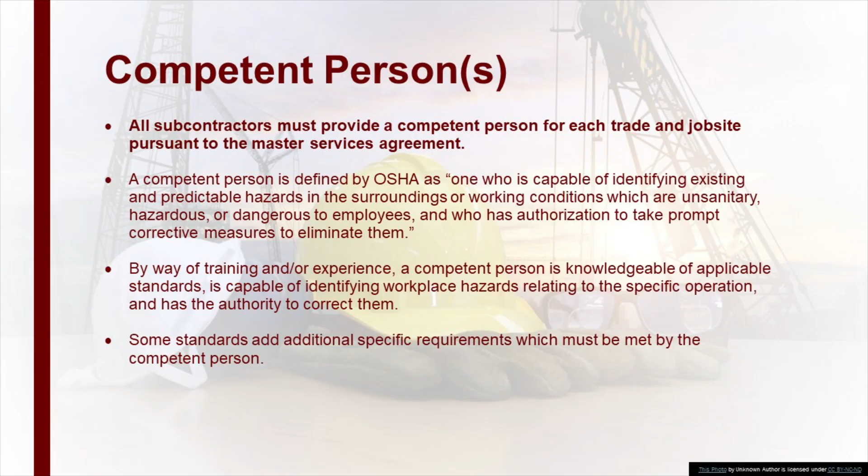All subcontractors must provide a competent person for each trade and job site pursuant to the Master Services Agreement. A competent person is defined by OSHA as one who is capable of identifying existing and predictable hazards in the surrounding or working conditions which are unsanitary, hazardous, or dangerous to employees, and who has authorization to take prompt corrective measures to eliminate them. By way of training and/or experience, a competent person is knowledgeable of applicable standards, is capable of identifying workplace hazards relating to the specific operation, and has the authority to correct them. Some standards add additional specific requirements which must be met by the competent person.

If you are not feeling well, please don't come to work. Practice social distancing, maintain 6 feet of distance apart. Cleanliness and hygiene: wash your hands with soap and water, or use hand sanitizer frequently. Avoid touching the nose, mouth, eyes, and face. Clean and disinfect frequently used tools and equipment.

Communicate: report all suspected cases of COVID-19 illness. Be aware of COVID-19 signs and symptoms.

Skill Signal apps are free and available for download to any device. Clock in and clock out with your personal phone. Daily health screening questionnaires will appear on your personal device upon clocking in. Automated daily logs and analytics of attendance. Video orientations keep workers informed and aware of immediate surroundings. Record-keeping compliance allows workers to upload certs and training cards to their profile.

Holt superintendents will communicate the following with subcontractors before arrival to the job site. Ask your company-designated competent person about the site-specific information listed below: access points, emergency egress, muster points, bathroom facilities, hand wash stations.

Prohibited: stealing, gambling, jewelry, music or MP3 players, illegal drugs or alcohol, smoking except in designated areas, firearms, knives longer than 4 inches. Zero tolerance for fighting, horseplay, riding in the back of a pickup, cell phone use while working, harassment including sexual, racial, staring, and rude comments. Violations are subject to Holt Construction disciplinary policy, which includes immediate removal from the project.

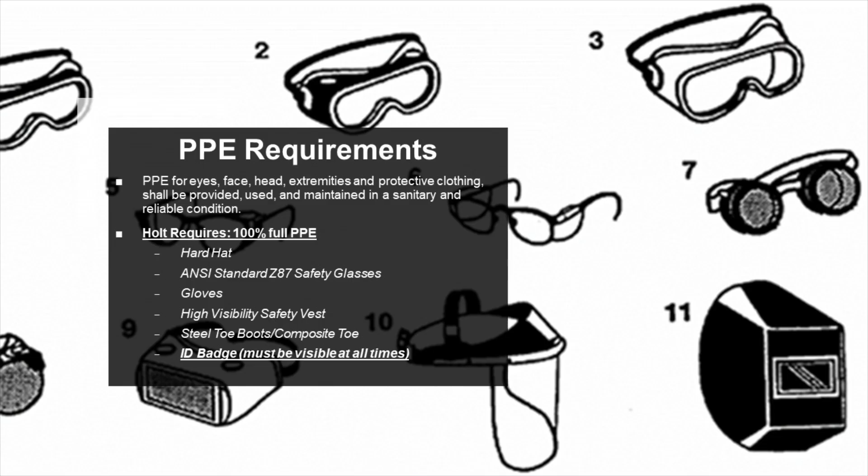PPE for eyes, face, head, extremities, and protective clothing shall be provided, used, and maintained in a sanitary and reliable condition. Holt requires 100% full PPE: hard hat, ANSI standard Z87 safety glasses, gloves, high visibility safety vest, steel toe or composite toe boots. ID badge must be visible at all times.

Hard hats: your brain is the most vital part of your body. Any damage done there will affect the rest of your body in some way. Even small objects can seriously hurt you if you are unprotected and they fall from great heights.

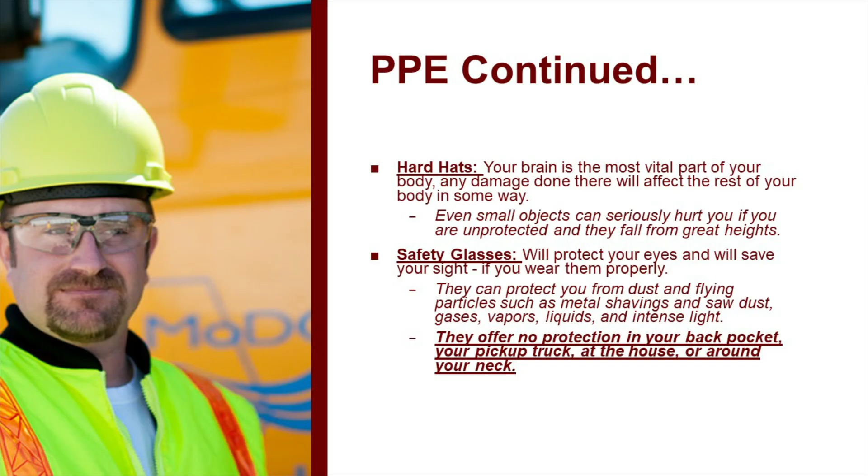Safety glasses will protect your eyes and will save your sight if you wear them properly. They can protect you from dust and flying particles such as metal shavings and sawdust, gases, vapors, liquids, and intense light. They offer no protection in your back pocket, your pickup truck, at the house, or around your neck.

Gloves: your hands are your wage earners. Protect them. Holt requires 100% glove use on site. Hands are hurt more often than any other part of the body. Hand injuries don't have to occur. It is up to you to think and keep them out of trouble. Be sure you wear the right kind of gloves for the particular kind of work you are doing.

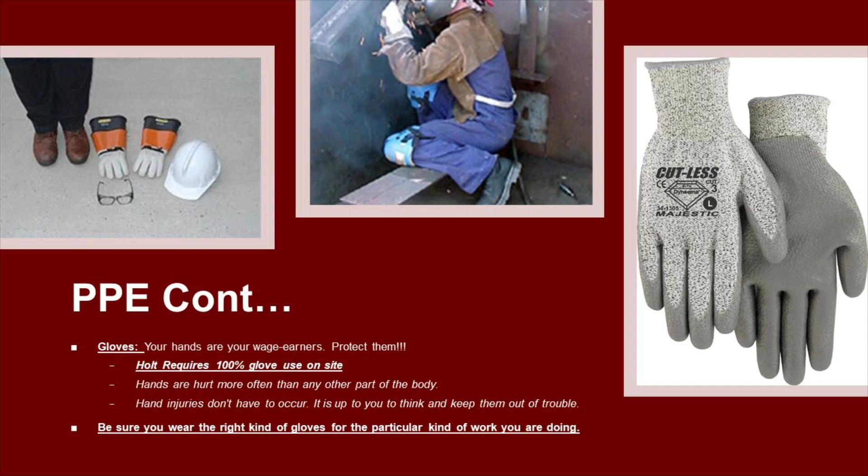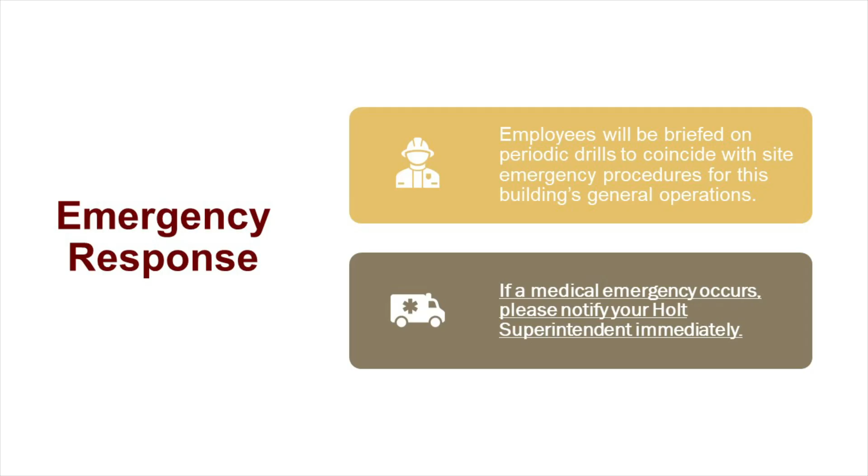Employees will be briefed on periodic drills to coincide with site emergency procedures for this building's general operations. If a medical emergency occurs, please notify your Holt superintendent immediately.

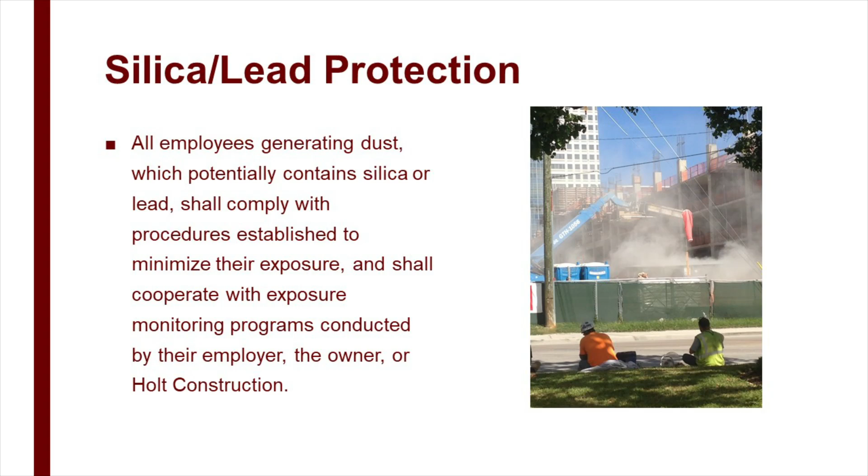All employees generating dust which potentially contains silica or lead shall comply with procedures established to minimize their exposure, and shall cooperate with exposure monitoring programs conducted by their employer, the owner, or Holt Construction.

Holt Construction Corp shall maintain and provide a complete inventory of chemicals brought to the job site via SDS. Note: SDS must be on site.

All SDSs will contain product information: product identifier, name, manufacturer and suppliers names, addresses, and emergency phone numbers, hazardous ingredients, and physical data.

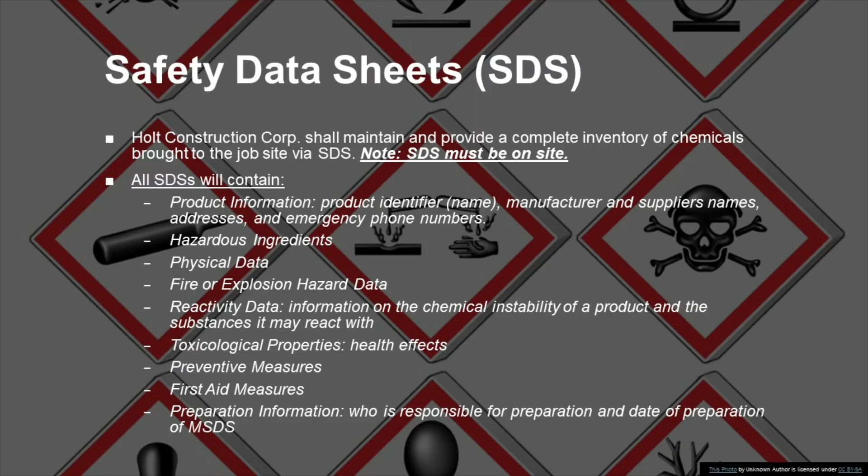Fire or explosion hazard data, reactivity data, information on the chemical instability of a product and the substances it may react with, toxicological properties, health effects, preventive measures, first aid measures, preparation information, who is responsible for preparation, and date of preparation of MSDS. When handling chemicals and hazardous materials, appropriate safety equipment must be properly donned.

This includes hard hats, goggles and or face shields, rubber gloves, aprons, and work shoes. Drop cloths will be used to contain any splash off or accidental spill.

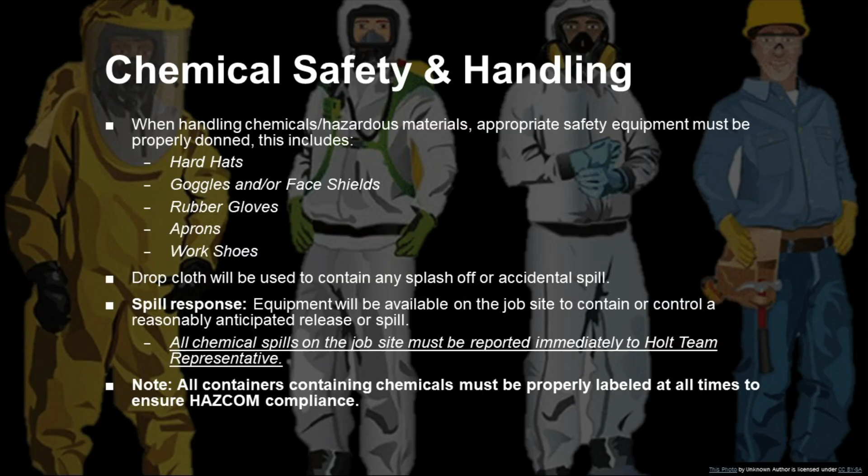Spill response equipment will be available on the job site to contain or control a reasonably anticipated release or spill. All chemical spills on the job site must be reported immediately to a Holt team representative. Note, all containers containing chemicals must be properly labeled at all times to ensure HAZCOM compliance.

Proper lifting procedures should be utilized when lifting objects off the ground. Break load into parts, get help with heavy or bulky items, ask or use a dolly. Lift with legs, keep back straight, do not twist. Use handling aids such as steps, trestles, shoulder pads, handles, and wheels. Avoid lifting above shoulder level.

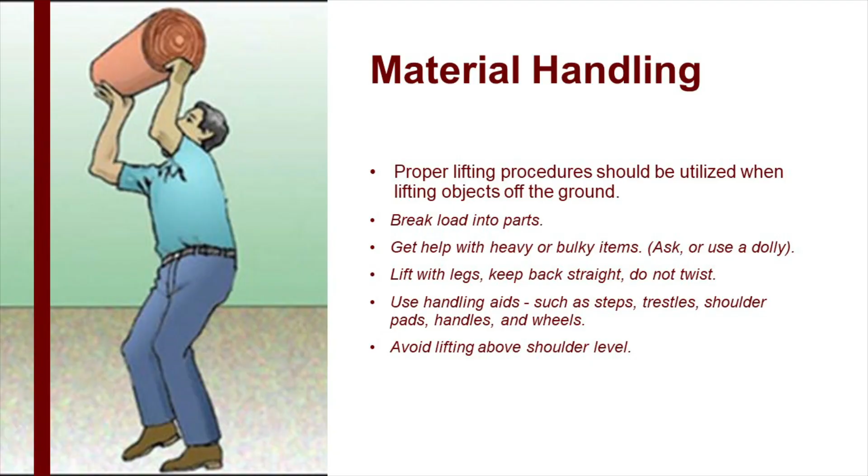Report all accidents and incidents immediately to a Holt team representative, including injuries, property damage, fires, and near misses. Accident reports include date, time, location, description of operations, description of accident, photographs, interviews of employees and witnesses, and measurements.

We have permit processes that need to be completed before you can work. Multiple permits may be required for your workday. Your foreman or supervisor is responsible for completing these permits. You are responsible for reading, participating with the process, and signing off on the JSA, Job Safety Analysis. If you feel like something can be added to this document to make your crew safer, do not hesitate to bring this to the attention of your foreman or supervisor.

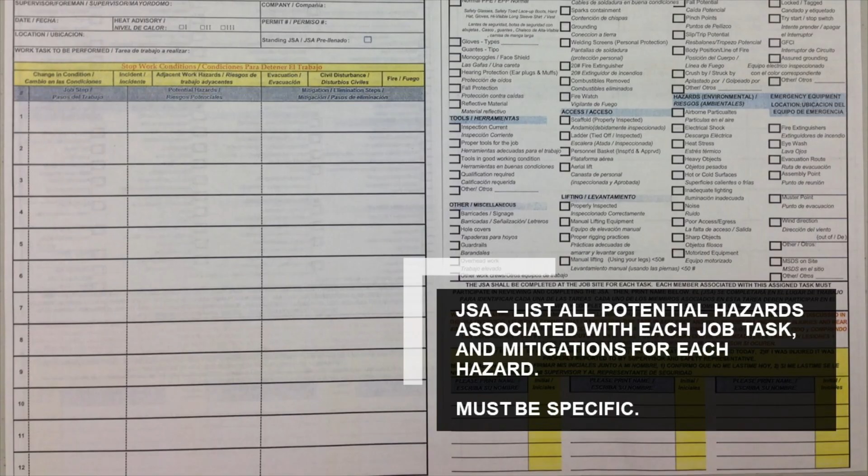JSA: list all potential hazards associated with each job task and mitigations for each hazard. Must be specific. Hot work permit.

Confined space entry permit. Every confined space on site is considered a permit-required confined space. SDS sheets for the confined space will be kept at entry and exit portals of the confined space for the duration of work. Atmospheric testing must be performed before entering a confined space.

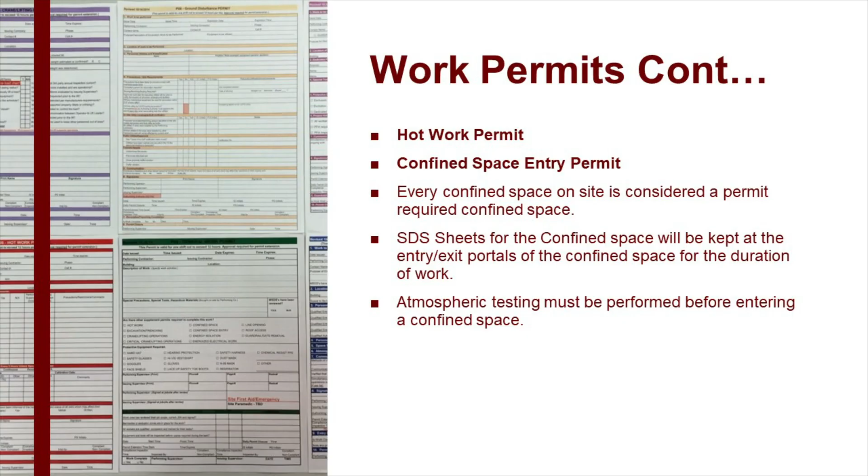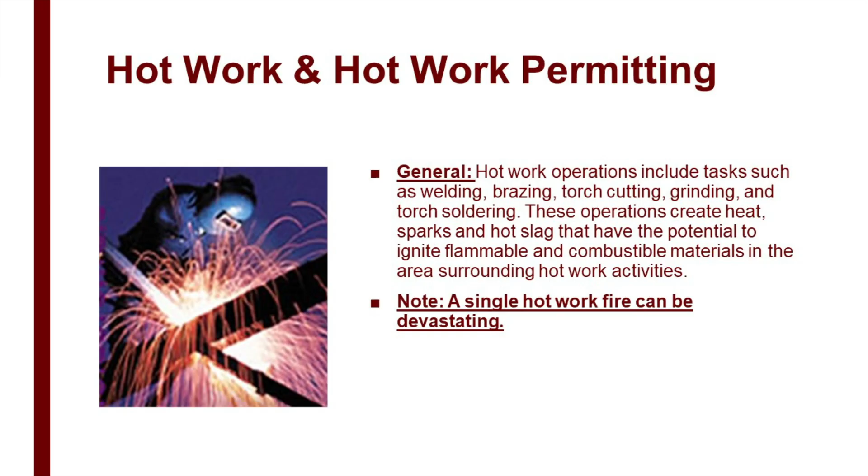General: hot work operations include tasks such as welding, brazing, torch cutting, grinding, and torch soldering. These operations create heat, sparks, and hot slag that have the potential to ignite flammable and combustible materials in the area surrounding hot work activities. Note, a single hot work fire can be devastating.

Guidelines: hot work should be performed in designated hot work locations. A hot work permit is valid for one day and for one area. It should be posted in the area of hot work for the duration of the activity.

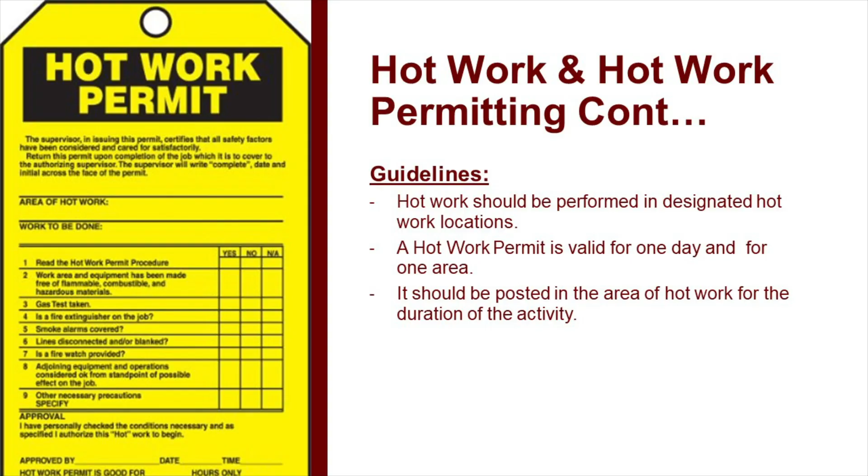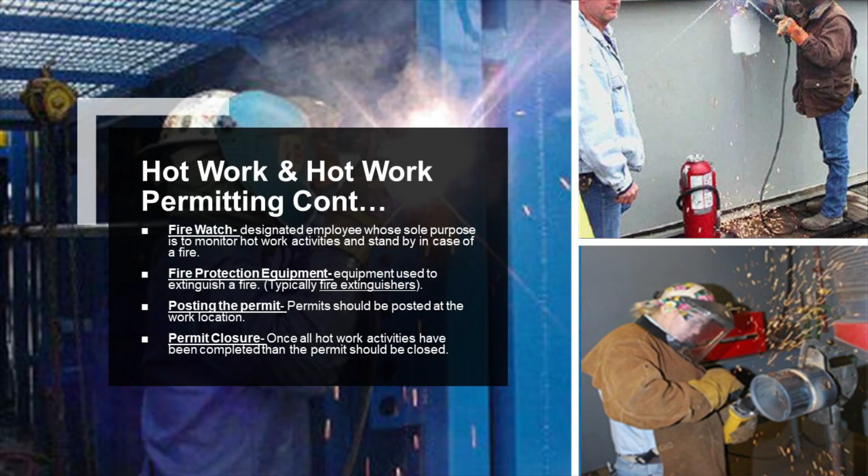Firewatch is a designated employee whose sole purpose is to monitor hot work activities and stand by in case of a fire. Fire protection equipment is used to extinguish a fire, typically fire extinguishers. The permit should be posted at the work location. Once all hot work activities have been completed, the permit should be closed.

Lockout: the placement of a lockout device on an energy isolating device ensures that the energy isolating device and the equipment being controlled cannot be operated until the lockout device is removed. When a lock is attached to an energy isolating means, it is not to be removed without authorization of the authorized person responsible for it.

Tagout: the placement of a tagout device on an energy isolating device indicates the energy isolating device and the equipment being controlled may not be operated until the tagout device is removed. When a tag is attached to an energy isolating means, it is not to be removed without authorization of the authorized person responsible for it.

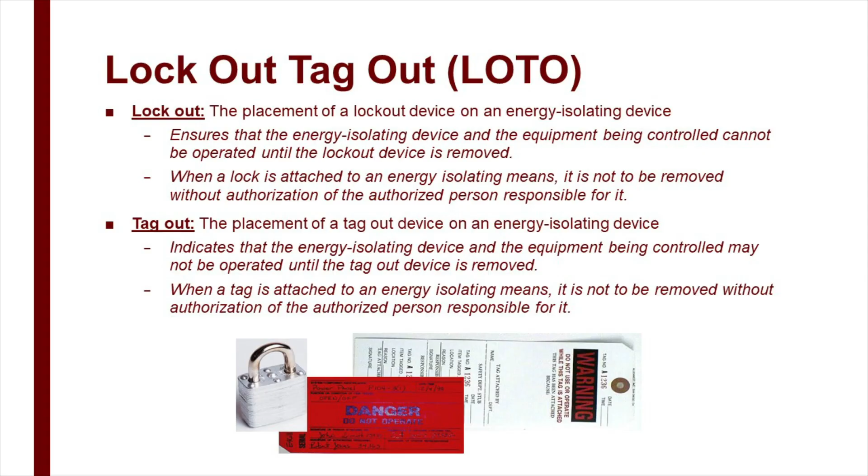When not in use, cylinders shall have their valves securely closed and regulators removed, and the protective cap must be in place. Storage should be outside of the building or structure when these are not being used within 24 hours. Weekends will be considered storage, and these need to be stored in an approved location.

All CGCs will be moved or transported in approved carts and properly secured. Ensure that your company name is on the CGC.

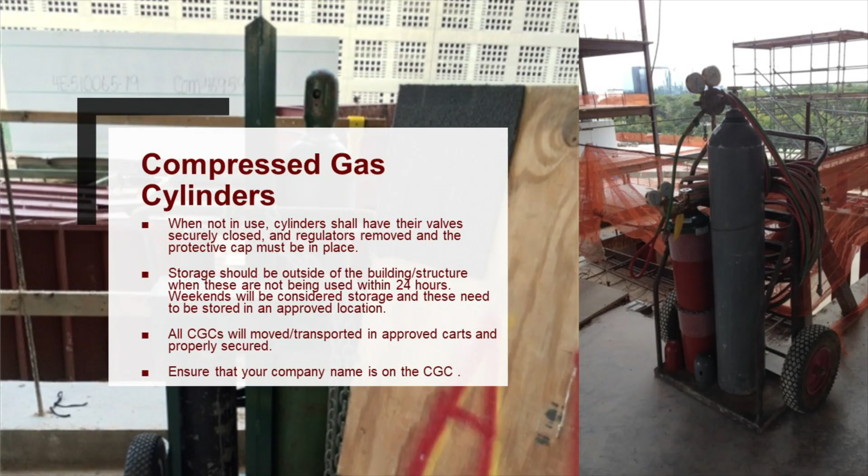Always operate your tool according to manufacturer's instructions. Maintain your tool regularly, keep cutting tools sharp. Never remove guards, disconnect tools when not in use. Never use a damaged or defective tool. Remove damaged tools and tag them do not use.

Keep cords away from sharp edges. Do not use corded power tools in wet areas.

Use tools in well-lit areas. Be sure you have been trained on the tool you are using. Use the right tool for the job. Inspect your tool before use. Must be certified to use.

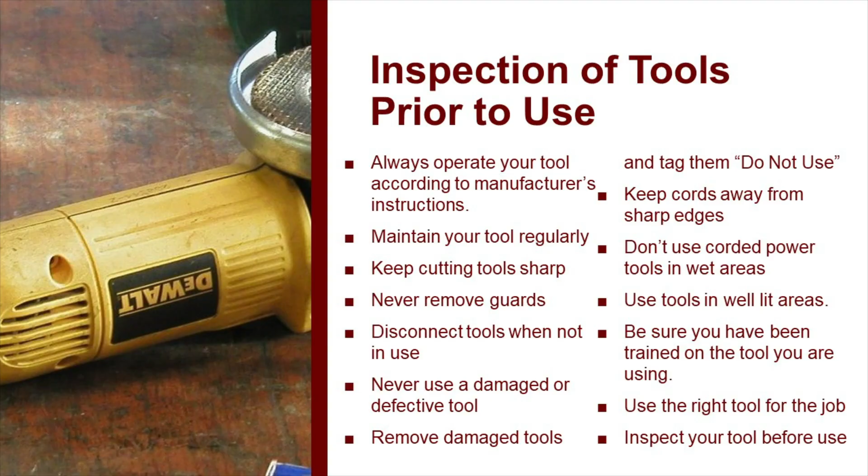Never point the tool at anyone. Never place your hand over the muzzle of a loaded tool. Always wear eye protection when using these tools. Always wear hearing protection when using these tools.

Load immediately before firing only. Do not leave tools or accessories unattended, even for a short period of time. Never carry a loaded tool from one job to another. Keep power-actuated tools in a safe place when not in use, preferably under lock and key.

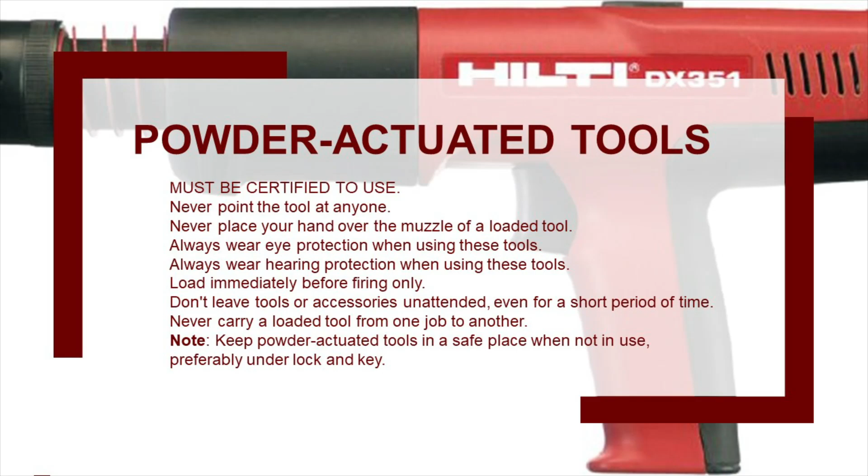All extension cords are to be 12 or 14 gauge, 3-pronged, and damage-free. This includes ground prongs must be in place. Outer insulation must be damage-free. Cords not free of damage will be removed from service immediately.

GFCI protection is required for all electrical equipment. Subcontractor personnel are required to perform daily inspection on all electrical cords and power tools. All tools, cords, and power sets shall have an assured equipment inspection program maintained on a quarterly basis.

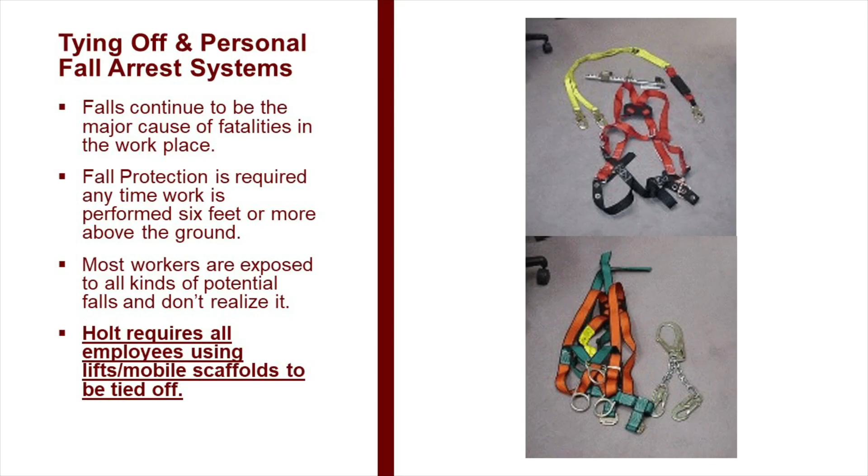Falls continue to be the major cause of fatalities in the workplace. Fall protection is required any time work is performed 6 feet or more above the ground. Most workers are exposed to all kinds of potential falls and don't realize it. Holt requires all employees using lifts or mobile scaffolds to be tied off.

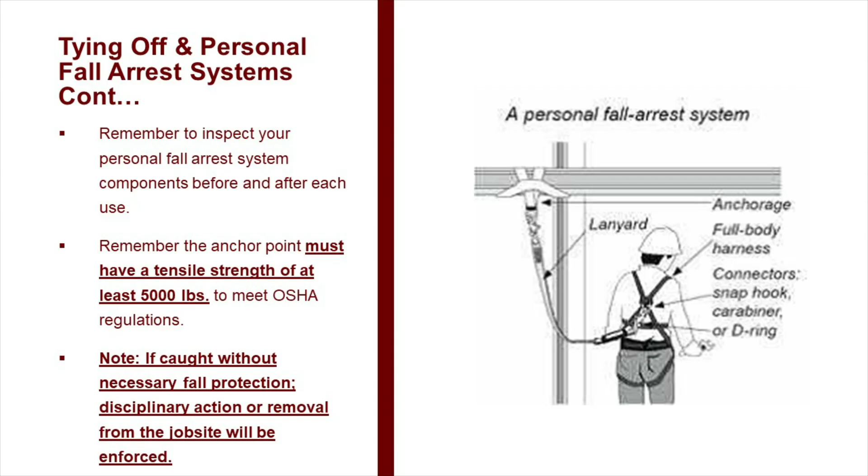Remember to inspect your personal fall arrest system components before and after each use. Remember the anchor point must have a tensile strength of at least 5,000 pounds to meet OSHA regulations. If caught without necessary fall protection, disciplinary action or removal from the job site will be enforced.

Aerial lifts include boom-supported aerial platforms, such as cherry pickers or bucket trucks. Employees need to have a certification card for the operation of a boom or scissor lift. Safe work practices when using lifts.

Inspect all aerial lifts before use. Do not stand on the rails, buckets, planks, or any makeshift device while working from aerial devices. Use a body harness with a lanyard attached to the boom or basket to prevent the workers from being ejected.

The major causes of fatalities are falls, electrocutions, collapses, and tip-overs. Scissor lifts or booms require 100% tie-offs at the job site.

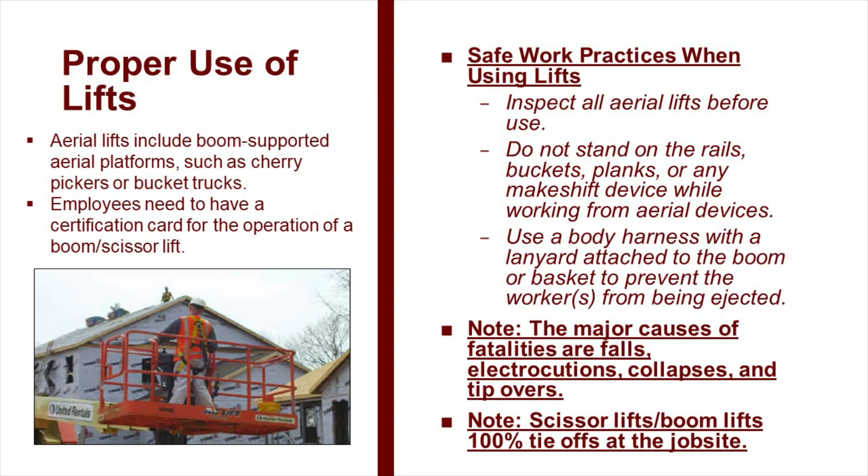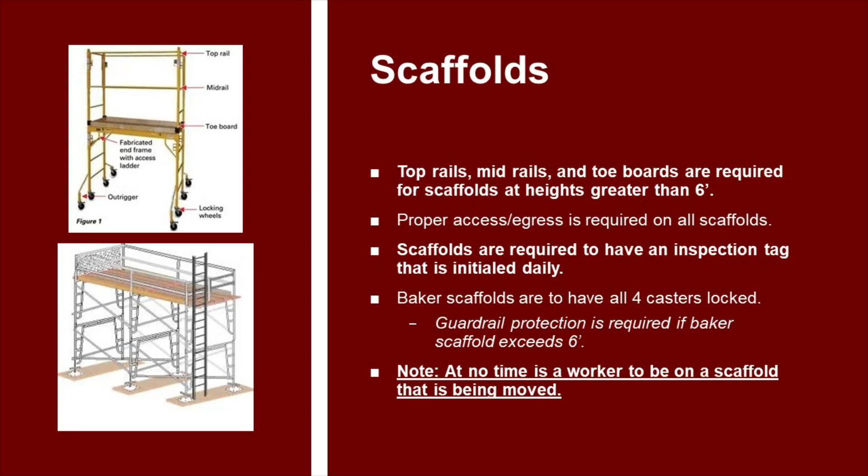Top rails, mid-rails, and toe boards are required for scaffolds at heights greater than 6 feet. Proper access and egress is required on all scaffolds. Scaffolds are required to have an inspection tag that is initialed daily. Baker scaffolds are to have all 4 casters locked. Guardrail protection is required if Baker scaffold exceeds 6 feet. At no time is a worker to be on a scaffold that is being moved.

Inspection of ladders. Before use, you must inspect the ladder. Broken or damaged ladders must not be used. Ladders needing repair must be reported to supervisor, tagged out, and removed from the work area.

Check the following: load rating stickers are on the ladder, are in place, and legible. There are no bent, cracked, or missing rungs or back supports. The slip-resistant feet are in place and in good condition.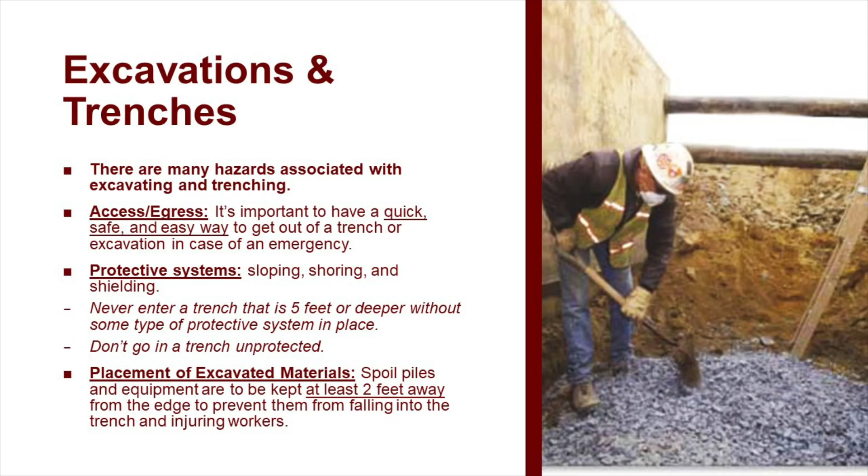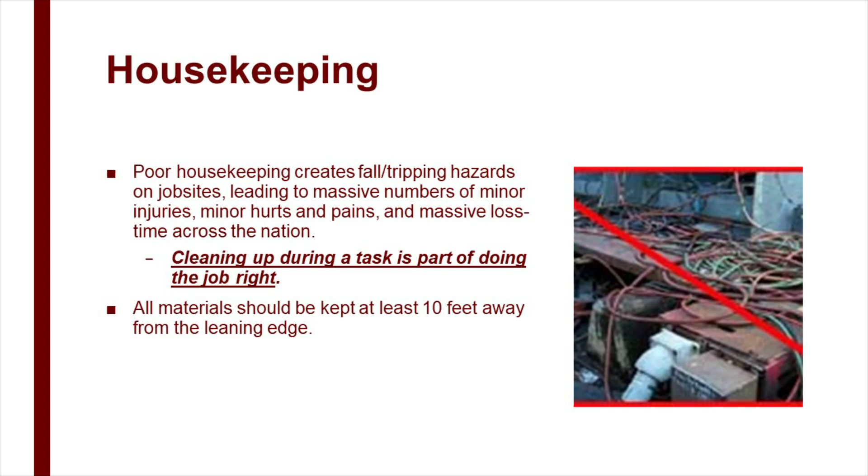Poor housekeeping creates fall and tripping hazards on job sites, leading to massive numbers of minor injuries, minor hurts and pains, and massive lost time around the nation. Cleaning up during a task is part of doing the job right. All materials should be kept at least 10 feet away from the leaning edge.

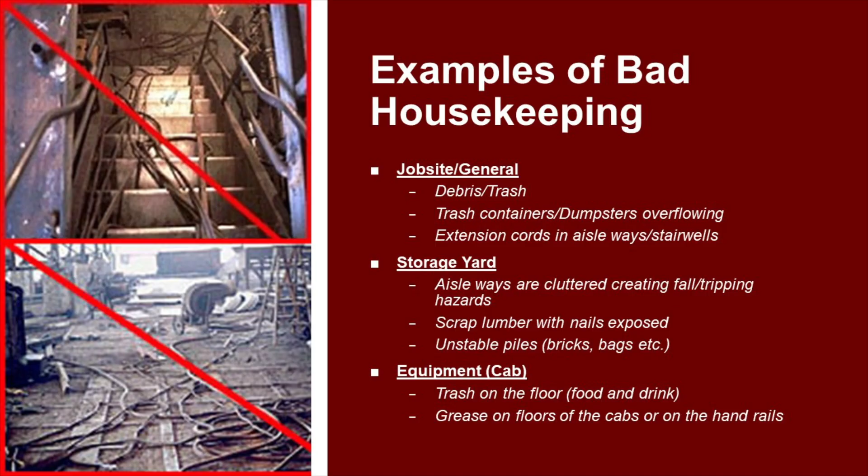Job site or general: debris or trash containers or dumpsters overflowing, extension cords in aisleways or stairwells, storage yard. Aisleways are cluttered, creating fall or tripping hazards. Scrap lumber with nails exposed. Unstable piles, bricks, bags, etc. Equipment cab: trash on the floor, food and drink, grease on floors of the cabs or on the handrails.